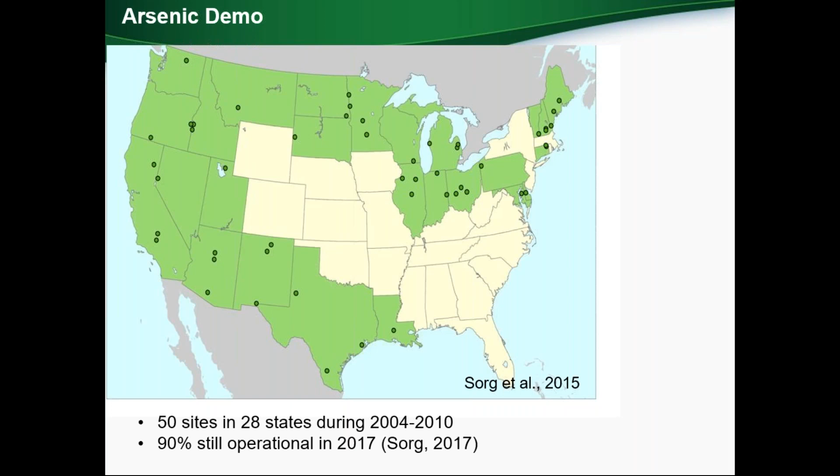So just a great visual of where the 50 sites of the original arsenic demo were located around the United States. I'll be citing Tom Sorg a lot, who was one of the leaders of the arsenic demo, so you'll be seeing his name a lot in these slides. So these are the 50 sites in the 28 states from 2004 to 2010. And interestingly enough, when Tom Sorg went back to ask these systems how they were doing in 2017, 90% were still operational, which is pretty impressive.

So if you know a little bit about me, I'm really interested in distribution system and flowing water interactions, more so than treatment per se, although I'm trying to expand to other areas. So then where does the arsenic demo fit? Well, thankfully, there's a lot of information that we can get from it. And what I've been looking into the last several years really has been this notion that pipe scales are reversible reservoirs for inorganics, including arsenic and many others, and radionuclides.

So I borrowed this schematic from the Journal of the American Water Works Association just to illustrate how contaminants that are coming through a pipe may actually sorb, deposit onto the pipe through a variety of accumulation mechanisms, either sorption or co-precipitation or sedimentation. So basically the pipes then become sinks for the contaminants to stay, but at the same time, through the reverse mechanisms, when those equilibria are disturbed, there may be a possibility for those contaminants to be released back into the water through the inverse mechanisms like desorption or destabilization.

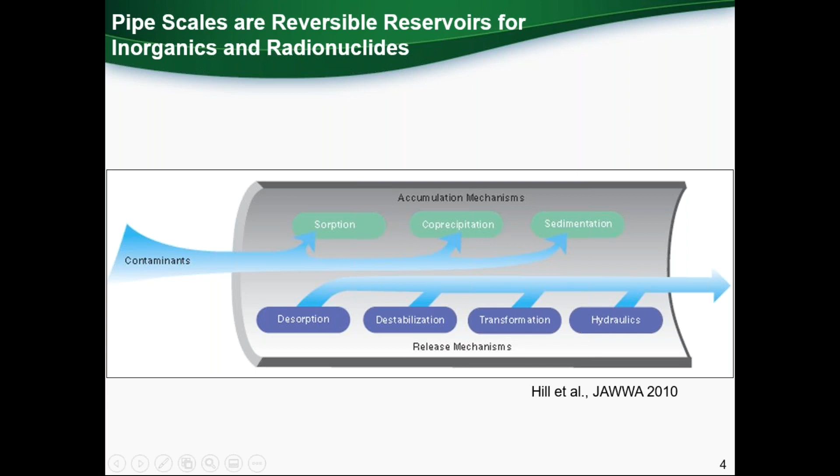We may even have transformation or hydraulic disturbances that, for example, release particulates into the water. So by looking at what has been coming in to the distribution system right here versus what has been coming out, we can actually infer what are the mechanisms that have been going on around here. So this is what we've been trying to do by revisiting the humongous data sets that were part of the original arsenic demo. So the first part of my talk really is going to be on water quality at the tap based on that information.

If you remember from an earlier slide, I talked about 50 systems overall that participated, but for the needs of this work, we focused on 20 systems only, because from the moment those systems installed arsenic treatment, they didn't have any known influence of other wells untreated for arsenic, or they didn't have any mixing of water sources that would affect water quality entering the distribution system and complicate our data comparison. So we just focused on the 20 systems for which we were pretty confident we knew what was the quality of the water coming in.

If you look at my schematic at the bottom of the slide here, what's really amazing about the data sets is that we actually had information on arsenic, iron, and manganese available for the treated source well water, meaning the water coming into the distribution system, versus 3 home taps. These were actually per system.

So these were homes, residences that were part of the Lead and Copper Rule sampling pool in those locations, and they were sampled before and after arsenic treatment, following the Lead and Copper Rule protocol, meaning a first draw water sample was collected, 1 liter, after a minimum overnight stagnation of about 6 hours, and that information really reflects the water that was coming out of the system at 3 different points of use per system. So this would be the water coming out in my schematic here at the bottom.

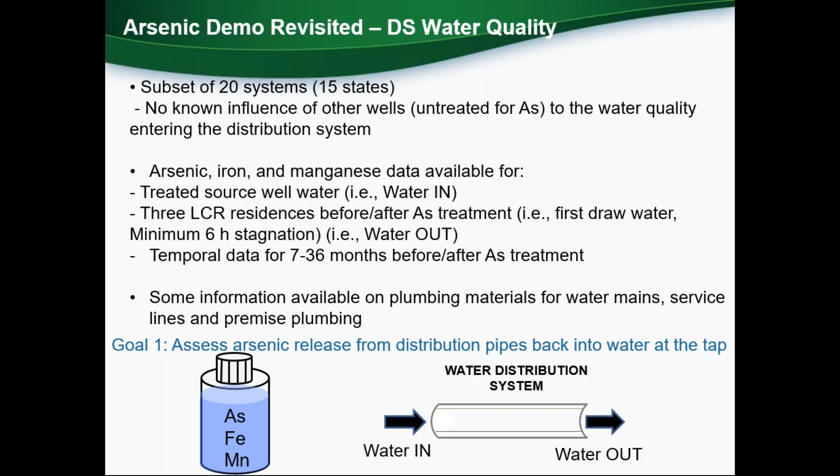This is a summary. I hope you can see my next slide. This is a summary of the systems that we looked into, the 20 that I mentioned, just to illustrate that we had different systems in different states, shown on the first column. The second column is the arsenic removal technology that was used. So I grouped the 20 systems depending on what arsenic treatment technology was used. For example, I put the systems that used adsorptive media first, and then other treatments like coagulation filtration, and you'll see in the next slide the remaining treatments.

The water samples that we had available to us are in this column here. So you'll see that we had monthly samples before arsenic treatment, which is good baseline information, and then monthly samples after arsenic treatment. If we focus on this highlighted system here, GF in New Hampshire, there were 4 data points before treatment, and then 15 to 16 after treatment, depending on the distribution system site. So this is more than a year of data after arsenic treatment.

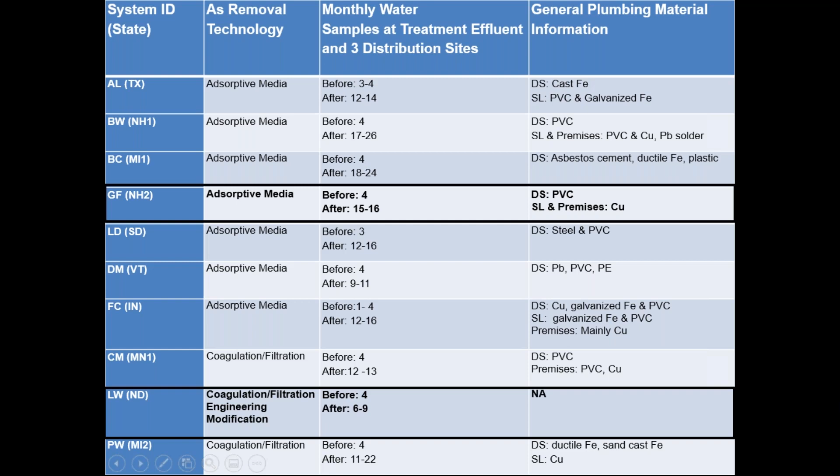It's pretty good information. The plumbing material information wasn't always complete. For this specific system, what was reported in the EPA report is that the distribution system had PVC and the service lines and premises were made out of copper. I have highlighted another system at the bottom, I basically bolded it. This is a coagulation filtration engineering modification system. This is going to be an illustrative example later on when I'm showing you the data. Unfortunately, we didn't have information on plumbing here. But this can give you a general idea of what kinds of systems we're talking about and what information we had available to us.

This next slide is the continuation of the 20 systems. I split them up into 2 slides because there was a lot of information to share. As we're moving down the systems, we have iron removal systems grouped down here, and another one bolded because I'll be talking about this specifically as well. It had about the same amount of information for before and after treatment as the previous systems, and a bit of information on the distribution system materials, which were PVC, but unfortunately not on the service line and premise plumbing materials.

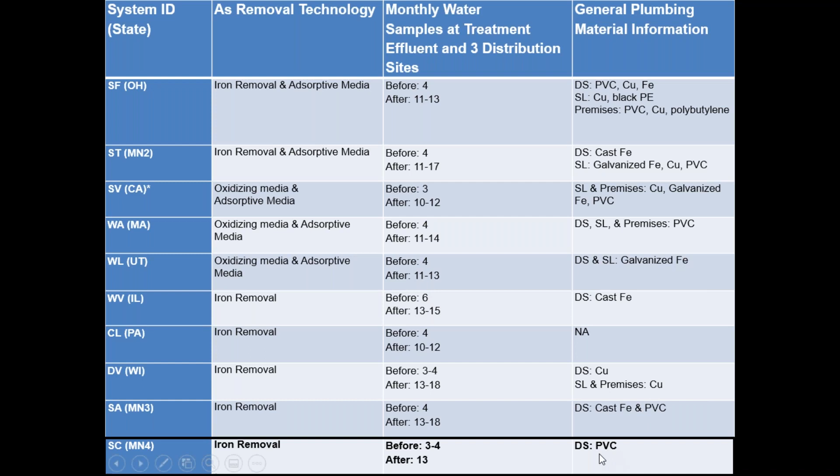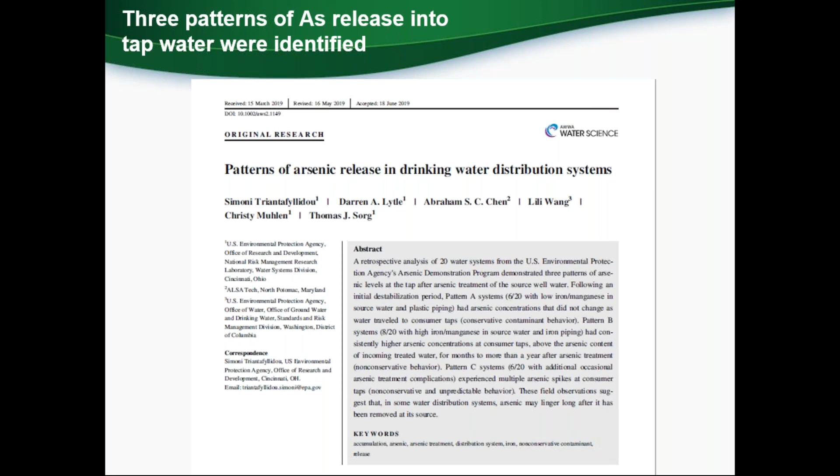So we looked into this data a while ago, and we identified 3 patterns of arsenic release into tap water. We published this information in the AWWA Journal of Water Science. If anyone would like more detailed information compared to the highlights I'm presenting here, please feel free to reach out to get a copy of this manuscript. So here I'm just going to give you some high-level highlights.

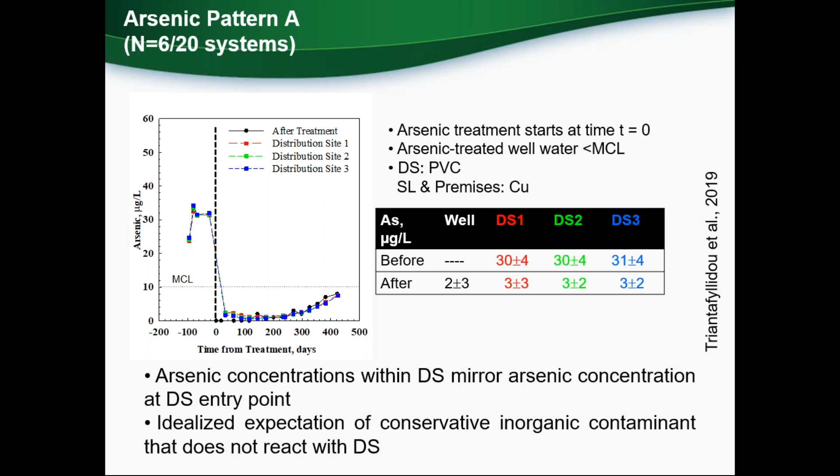Now we're moving on to a more complex system of pattern B. This is just to illustrate the pattern. It's one out of the 8 systems that followed this general trend, where you can see here things get a little bit more tricky. So water after treatment did have arsenic levels that were close to the MCL, but a little bit lower than the MCL. But 2 out of the 3 homes, those that are depicted by the red line and the green line, certainly had arsenic measured at concentrations that were far higher and above the MCL.

So for example, for distribution site 1, this is one of the 3 homes which is depicted by the red. Arsenic concentrations after treatment throughout the arsenic demo, if we average them out during that timeline, were 16 ppb plus or minus 2, a little bit of variability there. Distribution site 2 had 12 ppb plus or minus 2, so that was consistently above the MCL as well. Now these are home taps, so comparisons to the MCL don't have any regulatory impact, and in fact none of what we did here was intended to inform or affect any regulation, but we just wanted to see how contaminants actually behave from a science perspective and a research perspective.

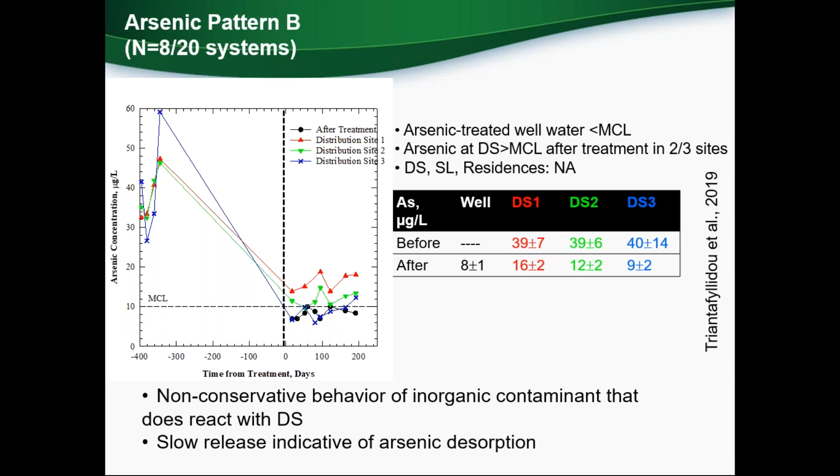I'm not showing you any iron results for this pattern B because they were not as interesting. Now, of course, we know that iron has a high affinity for arsenic, and oftentimes we look at arsenic contamination alongside iron and manganese. But so far for pattern A and pattern B, those were not as interesting, so I'm not going to be showing them to you.

But let's move into arsenic pattern C, the last and perhaps most complex out of the 3 that we identified. This was observed in 6 out of the 20 systems that we looked into. And again, if you look at this graph here, first of all, you'll notice there's no table offered alongside it. That's because there were a lot of spikes. You can see those on the graph. So calculating averages and standard deviations is not as meaningful because we have those single aberrant data points that would just make statistics a little bit weird.

So instead, we can just look at the data qualitatively from the graph, where I'm hoping what you can see is that if we focus on the black arrows first and the after-treatment data points here, there's definitely been inconsistent arsenic treatment of the well water because there is particulate breakthrough from the treatment system. Again, the black is what's coming into the distribution system, but there are also arsenic spikes and variability within the distribution system, and you can see those here in distribution site 1,

and 2 and 3 actually. So some of these spikes are occurring together for all the sampled sites. Some of them are just individually observed for a single site, for example, like this one here. So there is high variability in this pattern C. There's certainly spikes. These could imply that there's a more complex combination of release mechanisms for arsenic in systems that look like this. So in addition to perhaps a low level of desorption, that consistent low background release, there certainly is particle destabilization, and hydraulics seem to be a part of what's happening here.

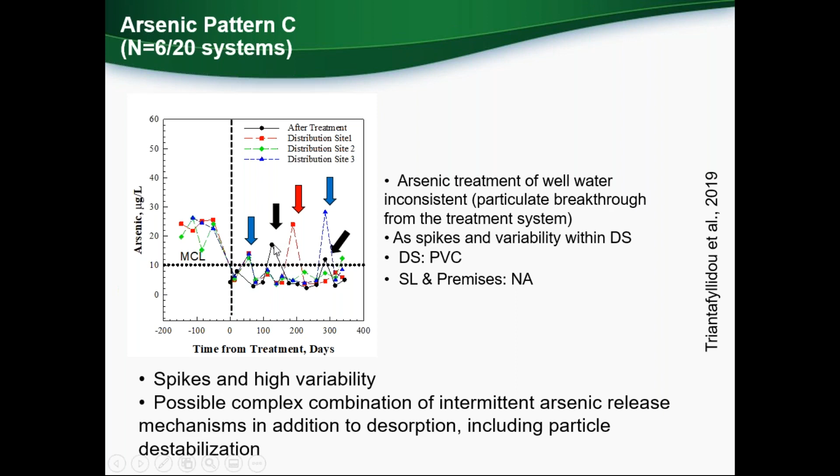Now here it's interesting to show you iron because there's definitely spikes of iron that coincide with the spikes in arsenic. So on the left we have total iron in water in micrograms per liter. I've plotted the secondary MCL so that we can see where we are relative to that. And you can certainly see, again, the breakthrough from the treatment system here, these are the spikes that are black, but you can also see spikes in homes that were sampled, like this big red spike here before day 200 of treatment. On the right, we have total manganese concentrations and again, the secondary MCL for manganese plotted here.

And there are spikes as well of manganese that you can see. Now, this is a treatment that actually added permanganate as part of their treatment. So of course there's an expectation that there's going to be some more manganese there, but there are still some spikes that actually coincide with some of the iron spikes and the arsenic spikes. Some of them are concurrent, and those imply particle detachment.

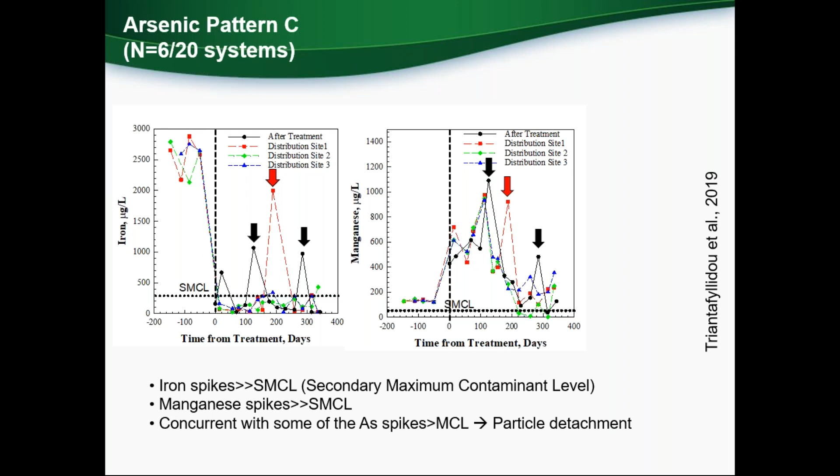This is a summary of the results, and again, way too much data to look into now, but I just wanted to focus on this right column here, which is the determination of arsenic pattern in systems, just to illustrate that for systems that were identified to be under pattern A, a lot of them were the ones that were using adsorptive media as their treatment. And the first illustrative example that I showed you is actually this highlighted system here of pattern A. When we move to pattern B and then pattern C, which is going to be on the next slide, we're now moving to different kinds of treatment. So they could almost be grouped based on treatment system and arsenic release pattern at the same time.

What I wanted to also point out here is that even if a system fell under arsenic pattern A, which is really the best case scenario, right? There's no interaction with the piping, and what comes in equals what comes out. But even then, that doesn't mean that we didn't have high arsenic levels. So if we look at another system here, which I didn't show you in detail, we can just look at the summary statistics here.

And this is system BW. It's right here. You can see that we calculated the percent of samples exceeding the health threshold of 10 micrograms per liter. And for the 3 distribution sites in that particular system, DS1, DS2, and DS3, more often than not, they were actually higher than the threshold. So we can have systems under this pattern where we're actually seeing arsenic levels higher than the MCL at the sample taps.

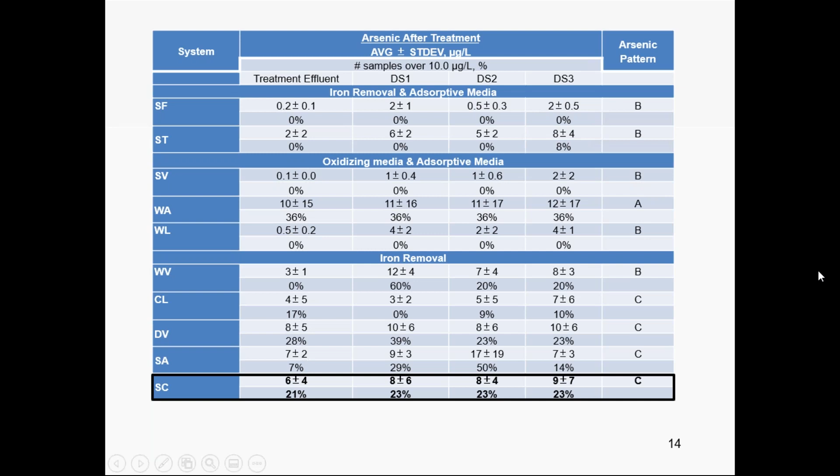So in summary, I tried to visualize the data in a way that's perhaps a little bit more simple to follow, and I'm going to look at the time here.

If we look at the treatment effluent, which is what was coming in, again, after arsenic treatment, arsenic concentrations were lowered, hopefully, if treatment was working well, to way below the MCL. But the three patterns A, B, and C either had a lag phase in the best case, which is pattern A, which after that lag phase did mirror the now low arsenic concentration coming in, but patterns B and C were more complicated with additional arsenic release from the distribution system.

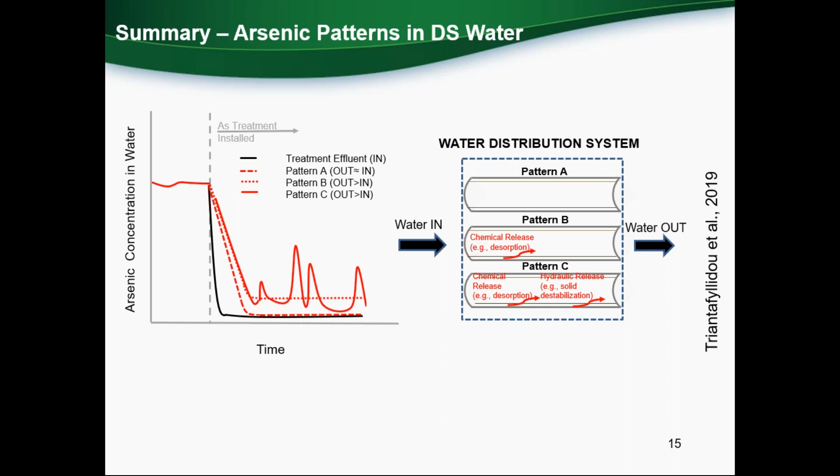So if we visualize our control volume then, which is really the whole water distribution system, we have water coming in, this is water at the entry point, versus water coming out. This was at the 3 homes of the lead and copper rule sampling pool. For pattern A, there wasn't really any interaction of the water with the pipe material, but for pattern B, there was this kind of slow release, which again is indicative of a chemical release mechanism. For example, it could be desorption. And pattern C is really the most complex of all, where we have, in addition to some possibly chemical release, that hydraulic release, meaning the solid destabilization.

So overall, we did identify 3 different patterns of arsenic release in tap water from the arsenic demo systems, and contributing factors to each pattern were the source water arsenic and iron levels, which really dictated the type of arsenic treatment that was chosen. There was some information we could get from pipe materials as well that helped with data interpretation. But the arsenic release patterns at consumer taps had increasing complexity. So we started with pattern A, which was really mostly conservative behavior in simpler systems that had low iron and manganese in the source well water and plastic pipe materials in the distribution system when that information was available.

But we then moved on to patterns B and C with non-conservative release in more complex systems where there was high iron and manganese in the source well water. There were iron pipe materials, according to the reports, whenever we did have that information, and there were occasional arsenic treatment complications as well. So overall, in some complex systems, not in all, arsenic and some other legacy inorganics may linger long after they have been removed at their source.

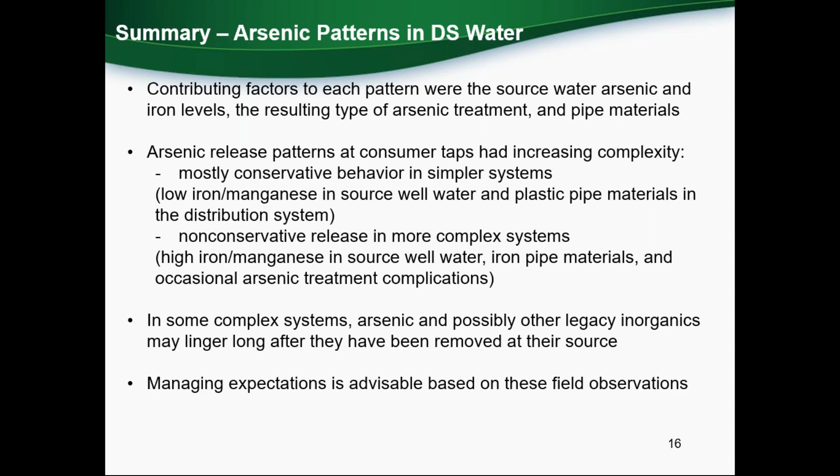And that's really important to be aware of in order to manage our expectations, because it doesn't mean that from the point you install arsenic treatment, the next day everything is going to be great and there's going to be no increased arsenic release observed at home taps. So this is the first part of what we looked into when we revisited the arsenic demo.

And the second part was looking at residuals from the arsenic demo, because there was a lot of information on that as well. And residuals management from the treatment itself was a major consideration in an early survey that had been conducted. Obviously, the quantity of residuals generated by a given treatment process is important. Their type, whether liquids and or solids, and their quality is also important because that will affect disposal options as dictated by regulations, either federal, state, and or local regulations. And even 10 years later, when Tom Sorg went back to the systems, media disposal was among the problems that were reported.

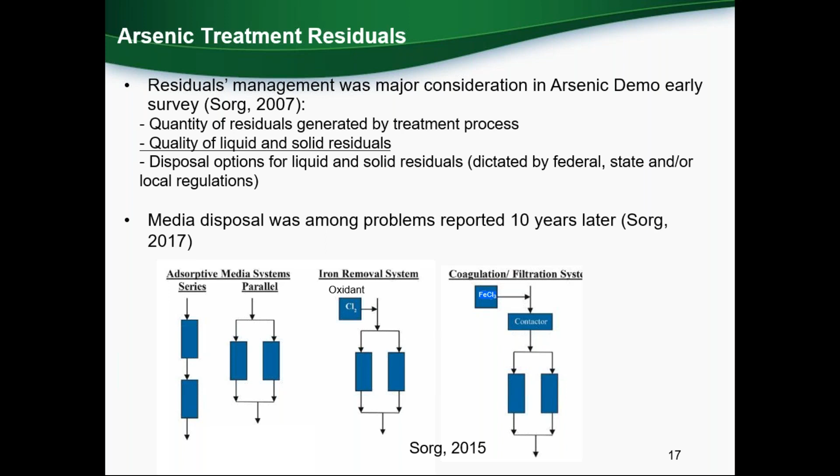So here's just some schematics of some of the treatments that were used. Adsorptive media were used in a lot of the small systems, and those can be either in series or in parallel. Iron removal was used in many systems, and coagulation filtration as well. And these really result in different kinds of residuals. So I've summarized them all here, but I'm not going to go into too much detail because I think I'm running out of time. But basically, we may have solid residuals like the exhausted media, for example, in an adsorptive media system. But we also have backwash water. It's part of the process, which may have solids in it as well.

And even in iron removal and coagulation filtration, where backwashing is also part of the process, we also get backwash water as a residual with possible solids. And there's all these different kinds of residuals disposal options that were available at the time of the arsenic demo.

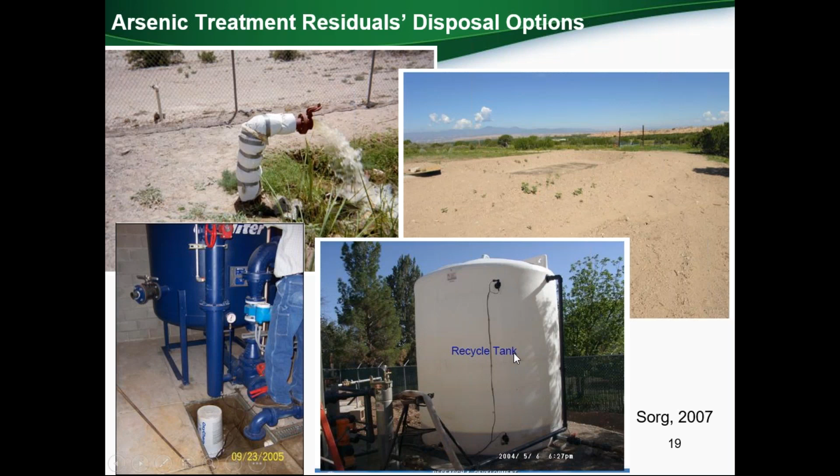And this probably should be expanded now, but these are just some visuals of, for example, this is direct connection to a sanitary sewer line of backwash water. This is here flowing directly onto the ground, evaporative pond and a recycle tank. But the point is that really residuals complicate things, and it's something that costs money, especially if they're hazardous, and that needs to be looked into.

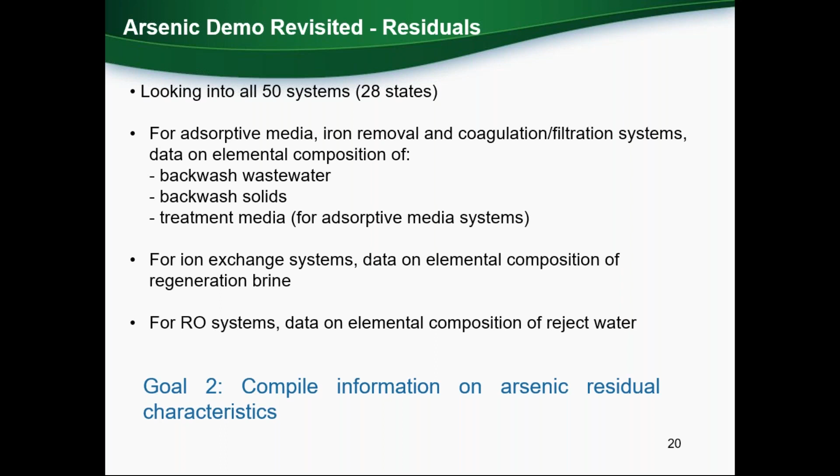I've been looking alongside a great team of other researchers into all 50 systems of the arsenic demo, for which there was information on the backwash water and solids, but also on the spent treatment media, for example, for adsorptive media systems. We're still in the process of analyzing this data, so I'm not going to go into too much detail, but here's an example of what arsenic levels look like in the backwash wastewater.

So this is arsenic concentration split into the particulate fraction on the red versus the soluble fraction on the blue for the different systems grouped per treatment. So for example, here we have the first group on adsorptive media, iron removal, and so forth. So you can see from the concentrations here, we have pretty high particulate concentrations, and the blues are not even visible, meaning that soluble arsenic was really low, which is to be expected. The whole point of backwashing is just to remove particulates and fluff up the media.

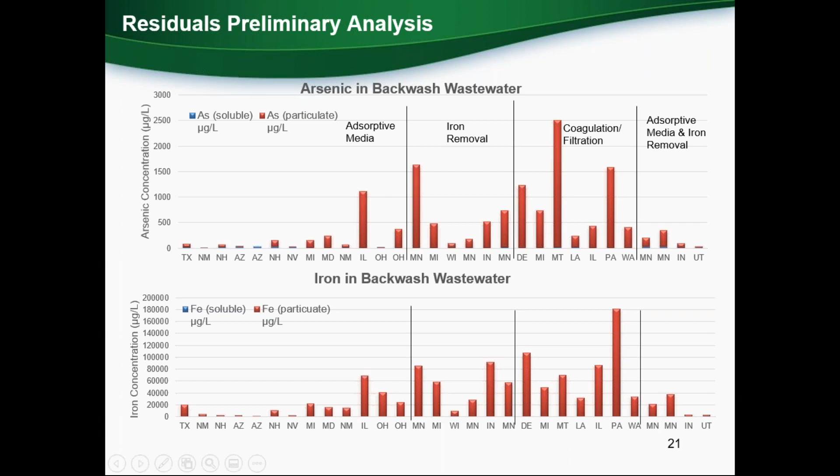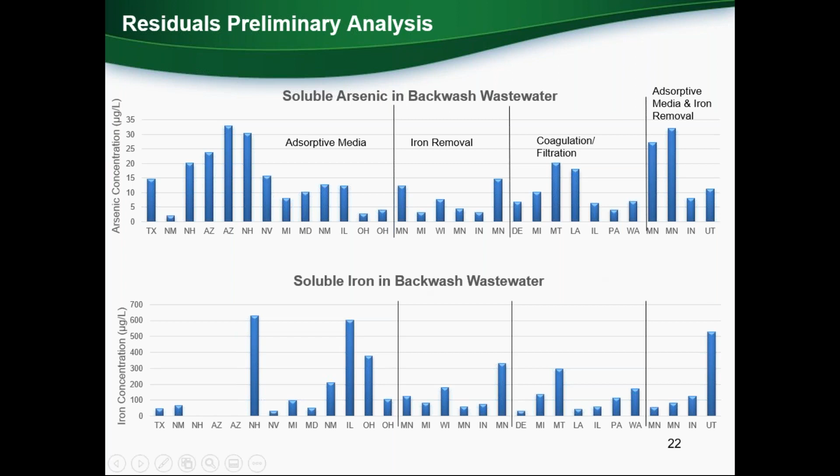And if you look at iron in backwash wastewater, similarly, there was really high particulate concentration, but not as much soluble. But if we kind of focus on the soluble, you'll see that it appeared really low on the previous graph, but here it certainly can be above 10, for example, which may complicate things in terms of how it's handled. And these are at the bottom, the corresponding soluble iron concentrations. So we looked into wastewater.

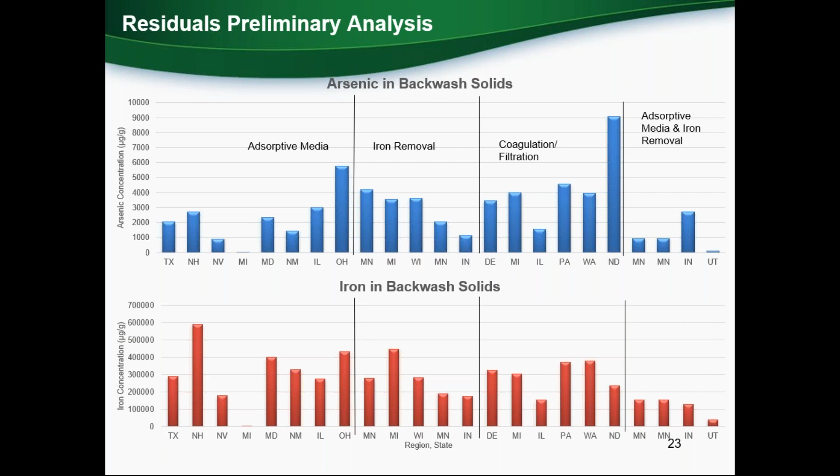This is a slide of backwash solids, where you can see arsenic on the top and iron at the bottom. So now we've switched to different concentration units, micrograms per gram, because we're talking about solids. And again, you can see the grouping of systems and the concentrations that we've observed. We are in the process of looking into other elements to perhaps get some mechanistic insights on how the media work.

So from just this very preliminary compilation, we found that soluble arsenic levels in the backwash were often greater than 10, especially for the adsorptive media systems. Obviously, particulate arsenic is of much greater concern, was higher in coagulation, filtration, and iron removal systems. But the whole point of this analysis overall is to try and figure out if we can get an idea very roughly of arsenic and co-occurring contaminant concentrations in residuals based on the case studies of the arsenic demo.

And we're looking into silica and phosphorus, for example. Can we infer if there's been silica or phosphorus competition for sorption sites, for example, relative to arsenic from the backwash data? So we're working on it, and more information is to come. But overall, there's been a great wealth of information on the arsenic demo to advance our understanding of arsenic levels at the tap after treatment, which, as I mentioned before, is really unique to have that knowledge at the tap, which is at the point of use where exposure happens, and to hopefully improve our understanding of the characteristics of residuals with this ongoing effort.

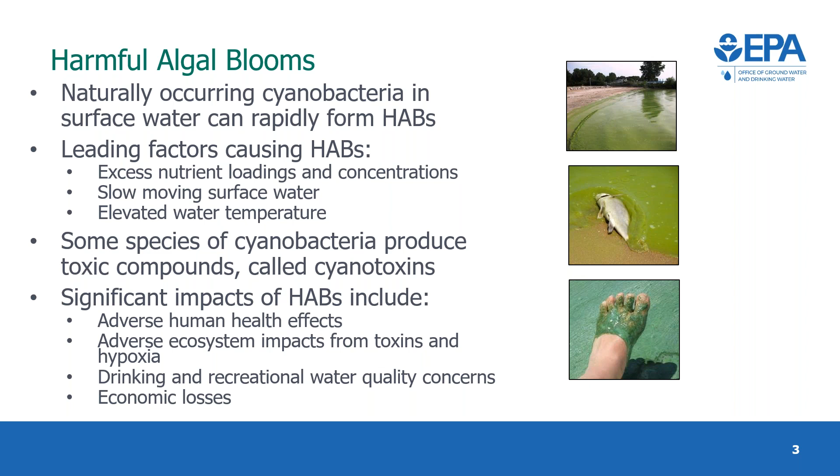And given this, not only the toxins but also the blooms themselves have significant impacts, including the human health effects from the toxins themselves, the ecosystem impacts from toxins, and also hypoxia that comes from the excess algal mass of the harmful algal bloom. And there are obvious drinking water and recreational water quality concerns and associated economic losses based on all those factors.

So really focusing on the drinking water challenges. The drinking water quality issues are unique to harmful algal blooms. There are several of them. Taste and odor issues arise from many harmful algal blooms in source water. Cyanobacteria are a source of many of the taste and odor compounds. And not only that, but also, as I mentioned before, the actual cyanotoxins. So these toxins have health effects.

And particularly when we're looking at the cyanotoxins microcystins and cylindrospermopsin, you're looking at health effects from gastroenteritis to liver and kidney damage. So some significant health effects from exposure to large elevated amounts of these toxins in drinking water. And then also there's this potential for development of disinfection byproducts.

Now this is an interesting factor in that there are several ways that HABs in your source water can contribute to disinfection byproducts in finished water, from the HAB material itself being a precursor to DBPs, to the approaches used to manage the HAB leading to disinfection byproduct formation in the distribution system. Obviously, there are ways to optimize both, but being aware of that and managing for both is critical during a harmful algal bloom in your source water.

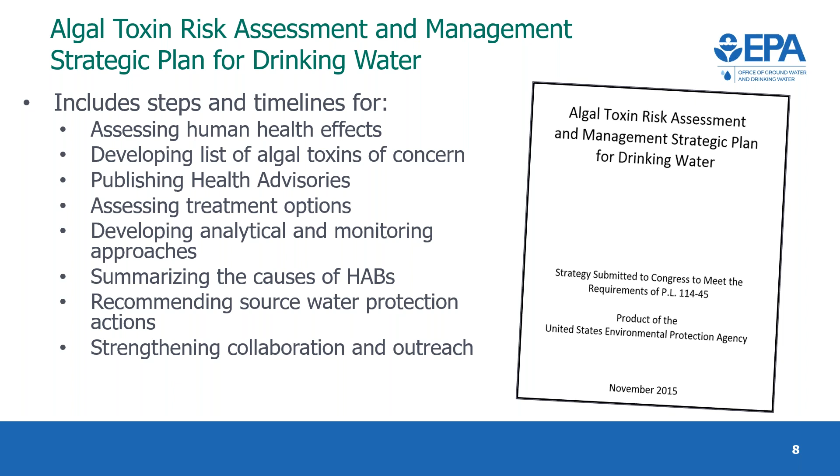So within the strategic plan, we talk about things such as going from assessing the health effects to looking at how to prevent HABs, and think about the causes of HABs, as well as when do HABs become toxic? Those kinds of questions that are ongoing we're trying to answer. Also, we've been trying to develop analytical and monitoring approaches and looking at assessing treatment options and those sorts of things. So I bring this to your attention just to let you know the context of where all these tools kind of fit in our larger plan.

And this is obviously a work in progress. And so I'm going to present to you the tools we've developed for states and public water systems and tribal communities in order to start to get at that issue of how do we manage the risks of cyanotoxins and HABs in our drinking water systems. So I'm going to cover many of these in a little bit more detail, but not all of them.

I did mention before this recommendations document. This is the document that we developed alongside those health advisories. And this document is meant to really provide a risk framework for how would you, in a risk management framework, implement some sort of health advisory or some sort of action level for these toxins in drinking water. And then also we have tools for how do you then develop a plan? What are the ways that you treat?

So this water treatment optimization document for cyanotoxins is one I'm not going to go into a lot of detail on. My colleague Tom Waters and others were very instrumental in developing it. And I highly recommend, if you're interested in treatment, really going and looking at that document. It's just a wonderful, large degree of information in it. So I highly recommend taking a look at it.

And the other thing I'm going to talk a little bit more about is how do you communicate the risks? So how do you communicate the risks of this within your system before, during, and after a harmful algal bloom? And then also thinking about some of these fact sheets we've developed, we developed this as a synthesized bit of information on some of the funding sources available. So what are the solutions and how do you fund those?

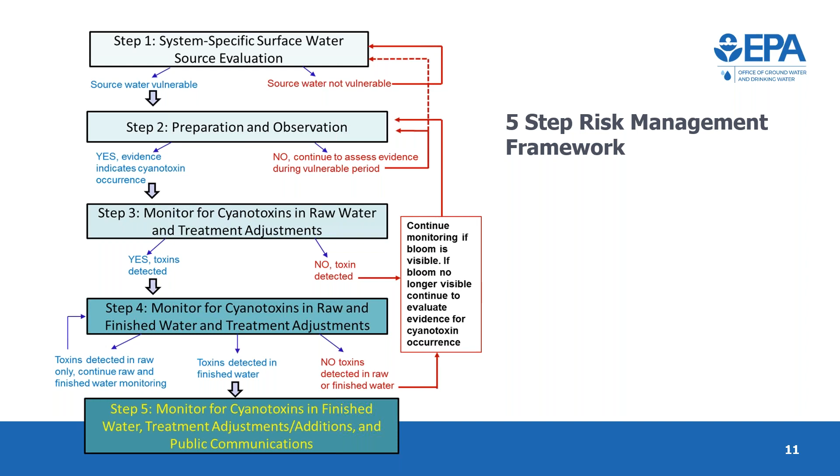But throughout these steps, you have a series of people that you're talking to, that you're getting feedback from. Hopefully you're making adjustments as adaptive management, so that you're circling back and constantly reassessing the risk and managing appropriately. So to put that into an actionable sort of document, rather than in that flow chart or in our recommendations document, which is still a really great resource, we wanted to provide something actionable to public water systems and states to really get a handle on how to implement this 5-step framework.

And so this template, also available online, provides the 5-step framework in a fillable template. So all of it is customizable to your public water system, and it really helps to have that plan in place, because it also has context for who you talk to when, at what point in that step process. What kind of activity triggers a communication with somebody else, or triggers another treatment option, or triggers different kinds of action. So it's very helpful to have it so that you're prepared and ready when things happen.

And we understand through talking with many of our stakeholders and public water systems that every system is really different. So we actually provide 5 example plans, so folks can get a sense of what other systems are doing, what they have done. And you'll see there's a lot of variety in how these systems are managing their cyanotoxins. They're all using that 5-step framework, but it's all very different in how they implement it, all getting to the same goal. So all of this is very customizable, but we think it's a great place to start. If you don't have a plan, you don't have to start from scratch. That blank page is tough. So this is our way to try to start to get at that.

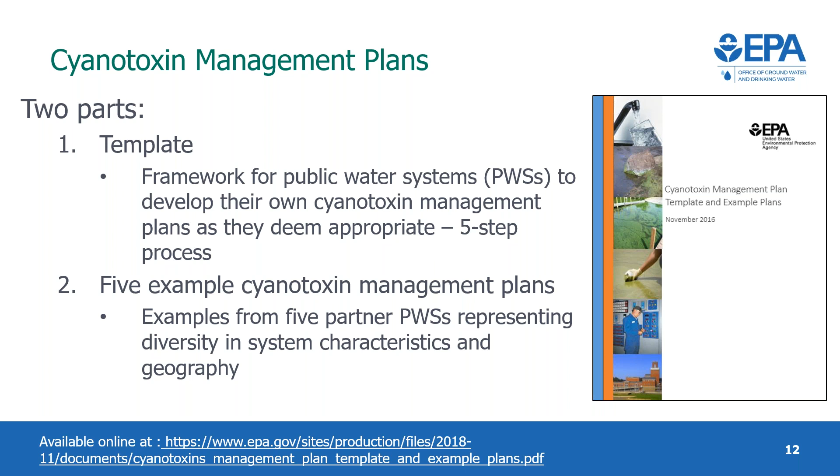And I'll mention that all of our tools can fit into this management plan. So this is sort of your larger plan, and that treatment optimization document will really give you the tools necessary to start to fill out that plan. And then also this risk communication toolbox that I'm going to talk about here is also going to help you fill in those communication pieces.

And I'll mention this toolbox that we developed. It's online, like all the other tools. And it is meant to be the way you communicate with the public. So the public is the audience, and it is not your plan for communication.

So the plan for communication should be in the cyanotoxin management plan if you choose to develop that, or any of your other plans, because knowing when to communicate is very important, and that's not the same thing as the things to communicate. So often the question is when to communicate. So having that understood up front is very important.

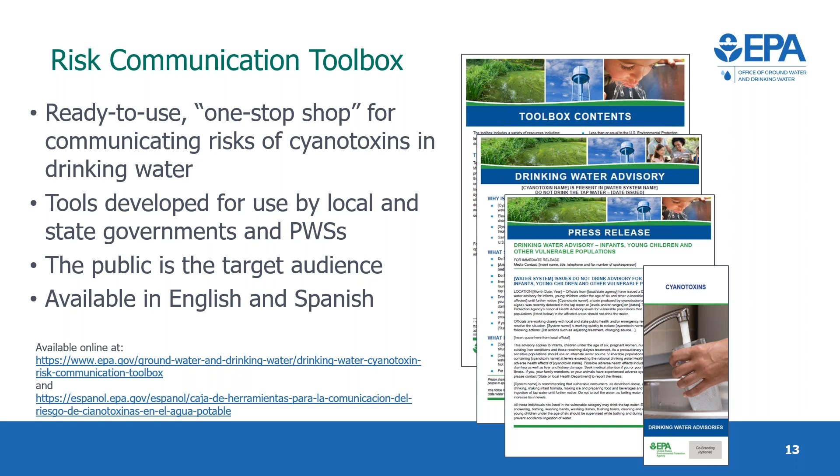And then this toolbox comes into play, where you have a lot of easy, again, customizable public releases, press releases, other kinds of like FAQs, fact sheets, a lot of different things that you can fill out that are already ready to go. And we recognize that many systems don't have their own communications department. Some might have their own communication materials, but for those that don't, this is sort of really easy, pick it up and go, and it is available in English and Spanish.

Now I want to mention that within these materials, we're using our health advisory levels that I mentioned earlier as our example. So we are using this as a way to frame these actions, and also as our communications points. So I have to just say, because I know it goes without saying, we have two health advisory cyanotoxins. We have two different populations and two different levels for both. So I want to just acknowledge the communication challenge. This is not the easiest thing to communicate.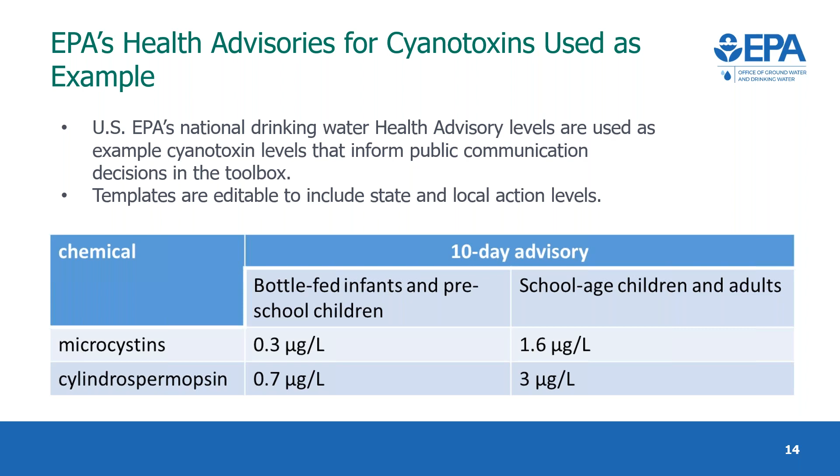And what we are trying to do is find the materials that really help you communicate this and really help get the message across about what are the actions at these different levels that the public could take, and what does it mean? What do these levels mean? So that's really to get at the point of what are the ways we want to communicate this. And we have a couple different things I want to mention here. You can go on our website and find all these materials.

But as I mentioned before, we have templates easily customizable, and you can use any action level that you have for your utility or for whatever your state regulations are. These are all customizable. And it includes lots of things that you just kind of plug and chug and go. So press releases that just need you to enter in your information that is specific to you, drinking water advisories, social media and text alerts. There are those that are ready to go and just customized to your situation.

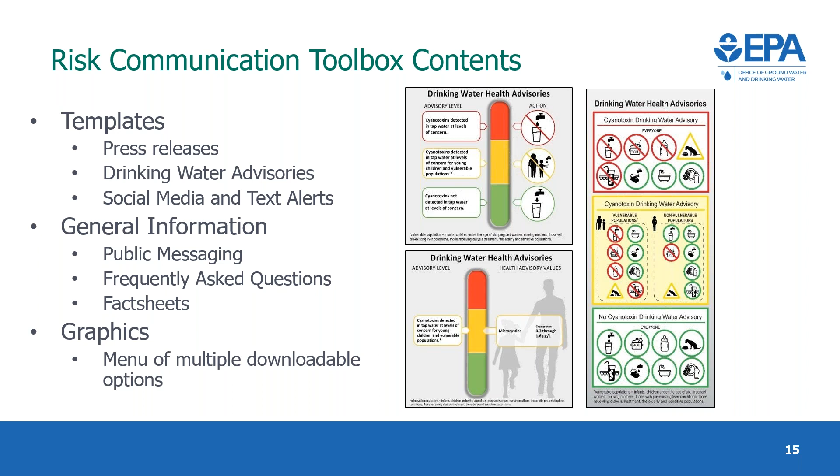There's also other general information, some fact sheets, frequently asked questions, and then also graphics, as you can see here on the right, that really help with the multiple ways to communicate something, and that many people learn in different ways. And we want to just be sure that you have all the materials necessary to try to communicate these risks. And we have many different options for these graphics. So I highly recommend taking a look at it if you have a minute.

So switching gears for a second, I'm going to talk about some of the fact sheets that aren't part of the toolbox, but rather these fact sheets are part of more of the synthesis of existing information. So this is part of our looking at what are the solutions for managing HABs in your source water. So what are the ways you can prevent HABs in your source water? And then also, what are the funding options for managing cyanotoxins in your drinking water? That's where the Drinking Water State Revolving Fund comes into play. So these two fact sheets really summarize the opportunities for those kinds of funding.

And if you were at Karen Worth's talk a couple of days ago, she would have mentioned a lot of these sort of opportunities and ability to leverage some of these opportunities. And these kinds of materials we have here are very specific to HABs. So I think what provides a lot of interest for folks that are dealing with HABs on a regular basis in their systems is that this is very tailored to HABs and talks about case studies and state examples of things that have worked and ways that people have leveraged funding and ways they've used the Drinking Water State Revolving Fund for a variety of different actions related to HABs in those source waters, and then also managing the cyanotoxins in the finished water.

Another fact sheet I want to just draw your attention to, because it's recently updated. So if you're someone who's looking at our materials all the time, I'm happy somebody's doing that.

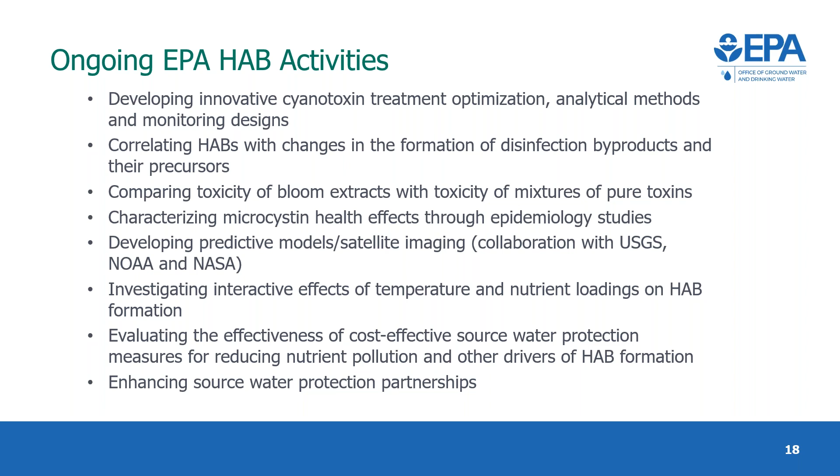And we have ongoing activities not only on the research, but also on our source water protection partnerships, and also looking at how to build those bridges between the source water piece and the finished water piece through our regional workshops. That's sort of an ongoing integration effort. We're trying to look at this issue in a holistic fashion. And we have colleagues that are also working on recreational water quality issues; recent advisory numbers for that have been published. And so a lot of ongoing work, and the work's not done. We are still following that roadmap, that strategic plan, to try to figure out the best ways to manage this at a national level.

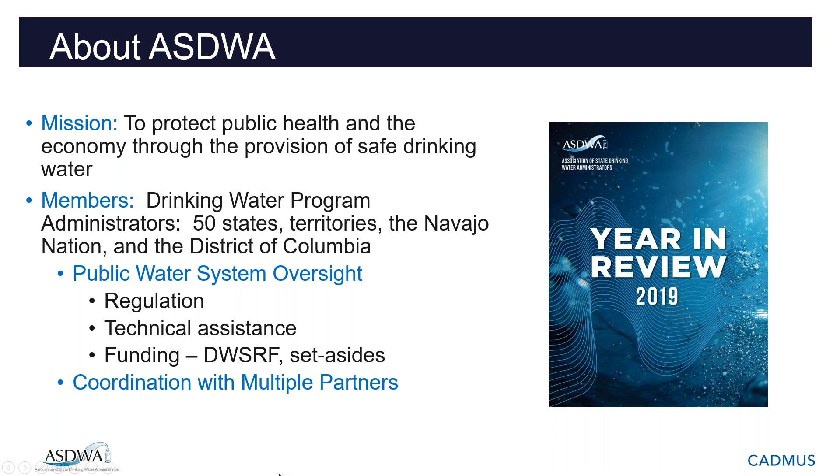And the purpose of our presentation today is to showcase ASDWA's new PFAS Source Water Protection Guide and Toolkit. And this is just one of many white papers, reports, resources, and tools that ASDWA has developed and posted on our website to help meet the needs of our members and also share information with many other stakeholders.

Because PFAS has caused widespread contamination across the country, the purpose of this tool is to demonstrate and share effective strategies that some states have used for addressing PFAS contamination risk in source waters. And this tool helps to inform policy decisions for state drinking water programs, water utilities, and other organizations to determine actions that they may or may not want to undertake to assess and address PFAS for protecting public health. And it also encourages collaboration and communication with state and local partners.

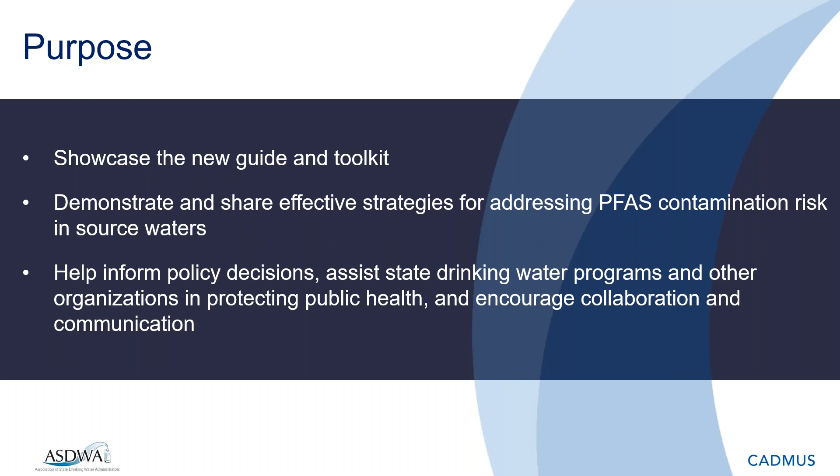And so why did we do this project? Well, ASDWA has a PFAS work group that includes members from many state drinking water programs from across the country. And the work group has been very active on writing comment letters to EPA and helps to set priorities for ASDWA's PFAS efforts and actions. And it was this PFAS work group that identified the need for this project.

And because while some of our states have set their own PFAS standards and conducted monitoring and cleanup actions, this project is really aimed at providing guidance and sharing examples for the many other states that are considering actions or are in the early stages of investigating sites with potential PFAS drinking water impacts and understanding the scope of potential PFAS contamination within their state.

And this is a tool for more than just the state primacy agencies who are ASDWA's members. It is also for water utilities and communities who can use it to update their source water assessments and GIS maps to prioritize locations for potential PFAS monitoring and sampling to identify sources of PFAS, and then if needed, conduct investigations and remediation actions based on known uses of PFAS in business and industry, as well as pathways for fate and transport.

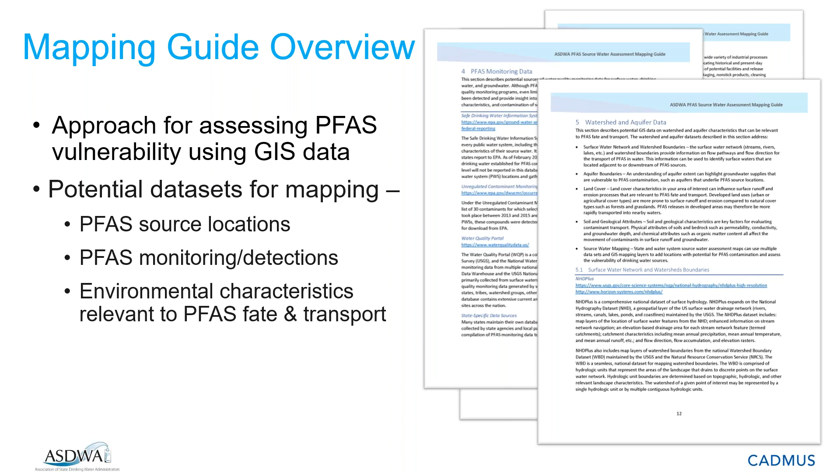The third step involves mapping potential PFAS sources. These could include locations that either produce, use, or store large quantities of PFAS. And the goal here is to identify higher risk locations for PFAS exposure to the surrounding environment. Step four, PFAS monitoring data is mapped to identify source water with and without detections. So source waters with PFAS detections could be readily classified as vulnerable and then prioritized for follow-up monitoring, analysis, and management.

Then step five, watershed and aquifer data are mapped to identify areas with higher risk. So high risk characteristics could include areas that are prone to surface runoff and erosion, or areas with shallow groundwater or higher rates of groundwater recharge. The final step, step six, pulls all of that information from the previous five steps together to classify the vulnerability of the source waters in your area of interest and to then identify priority source waters for next steps for management.

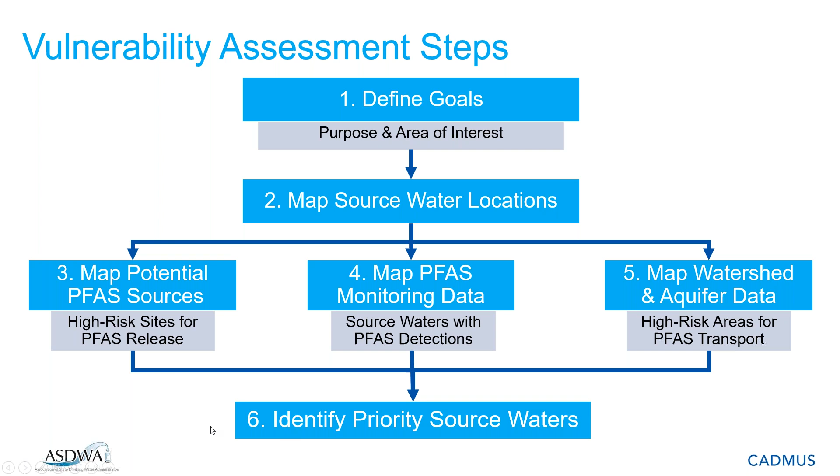For those asking, where do I start with a source water assessment? The mapping guide can provide a framework for key steps to characterize PFAS vulnerability and to identify priority source waters for monitoring and management. The guide also includes descriptions and links to those national data sets, as well as some of the state examples, which can be used to supplement and enhance the national data sources. The guide also includes the same list of NAICS codes that are in the technical appendix and that list of state databases that could be considered.

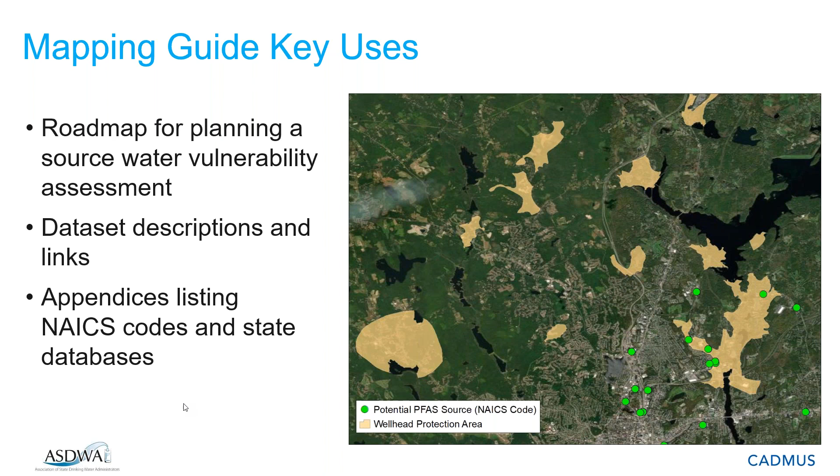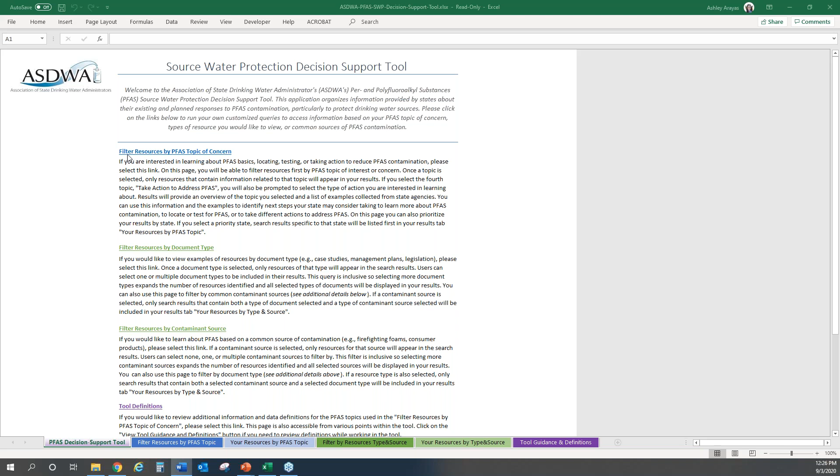Then we have these links to our different filter resource options, our entry forms that we just shared. So we can filter resources by PFAS topic of concern. We can filter them by document type. We can filter by contaminant source. And then we also have some additional helpful information here at the bottom of the home screen, where you can look at tool definitions that are used throughout the tool.

And there are links at the bottom to the technical appendix, the mapping guide, ASDWA's website, and to the fillable form. So if you are in the tool and you notice that there's some information about your state that's out of date, or if you would like to add something, you can just click on that from directly within the tool. It brings you to this PDF, which you can download, fill in, and then the bottom of the PDF file has a button to email your updates to Deirdre to get those in the queue for consideration for updates to the tool.

When you're in the tool, you'll also notice that it'll let you know when the tool was last updated, and you can view additional information, some acknowledgements. So we're going to jump into the filter resources by PFAS topic of concern. You can navigate there from either the links on the homepage or from the tabs at the bottom of your Excel worksheet.

If we take a look at the color coding here too, you can see that our filter resources by PFAS topic of concern are coordinated blue with your entry field and then the specific results that you get back. And then we also have our filter by resource type and source, which are combined. They're one form. They are here in green, and then we have our green tabs at the bottom. So if at any point you're unsure of where you are in the tool or where you'd like to go, you can use the tabs at the bottom or just return to the home page.

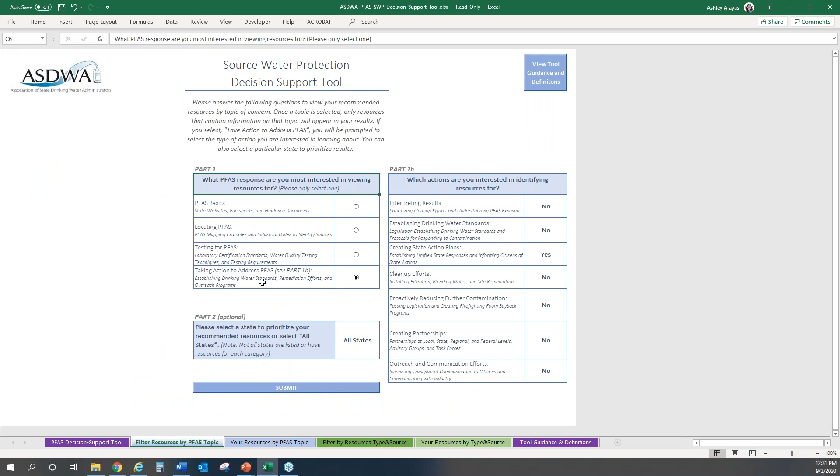When you are selecting from taking action to address PFAS, you can make multiple selections here. So if you are interested in what states are doing to interpret results, create state action plans, and their outreach and communication efforts, what you'll get are all of the results for all of those categories. So it's inclusive, it doesn't limit; a result doesn't have to meet multiple criteria.

And then here, if we select a state to prioritize, I'll select Colorado. Then we see that we have our selected criteria, our actions summarized again, and first we see our results from Colorado, then we see our national results and alphabetical by state after that.

There are a few tool tips and notes that'll appear at different times during the tool. This note is letting you know that although you selected multiple criteria, the summary that's being presented here is just for the first criteria that was selected, but you can always go to the tool guide and definitions tab to view definitions and additional information about the other criteria that you selected.

In the last minute here, I'm just going to take a quick minute to show you the other part of the tool. This is to view particular types of documents or sources. It's set up very similarly to the first form, and you can select from multiple document types. So we could select case studies and fact sheets here. And then if we ran our results, we would get all results that are case studies or fact sheets across every state and the national resources in the database.